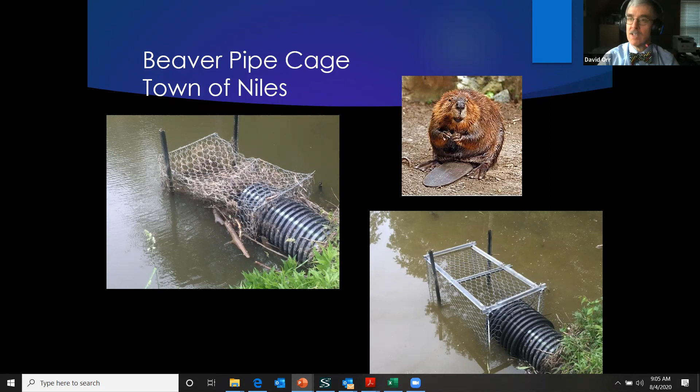Someone says Pat should patent this idea. Actually, the good news is, Pat, by us going public like this, you can't patent it anymore. No one can steal your patent because it's not patentable anymore under the way the rules work these days. But it's your idea. That's what my wife was saying, geez, we ought to put a patent on that. It's too late now, sorry about that. That's the way it goes.

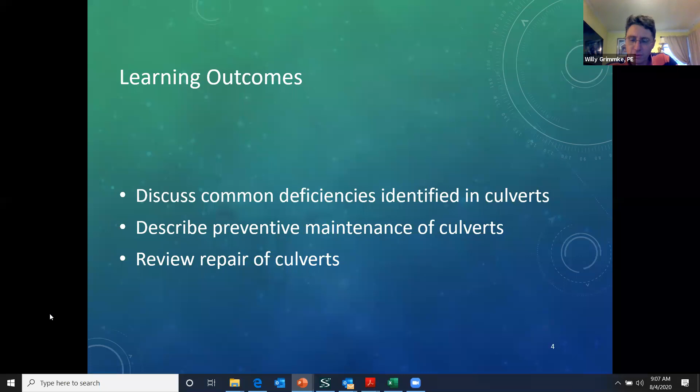Thank you. Good morning, everyone. We're going to talk a little bit about culverts today, and when we set up the date for this, we didn't really think it would be quite as timely with the ongoing heavy rains here in the eastern part of the state, with the hurricane and tropical storm coming through. What we're going to discuss is common deficiencies that you will encounter in culverts. We're going to deal with some PM methods, and we're going to review repairs of culverts.

So just as an introduction and for the purposes of discussion, so we're all on the same page here, we're going to go through some terminology.

So the crown would be the top or the arch of the culvert. The invert would be the bottom part of the culvert where the water flows. The haunches would be the areas between the invert and the spring line, which is the widest point. And particularly with pipe culverts, we're going to emphasize bedding because that is crucially important to the long-term performance of the culvert.

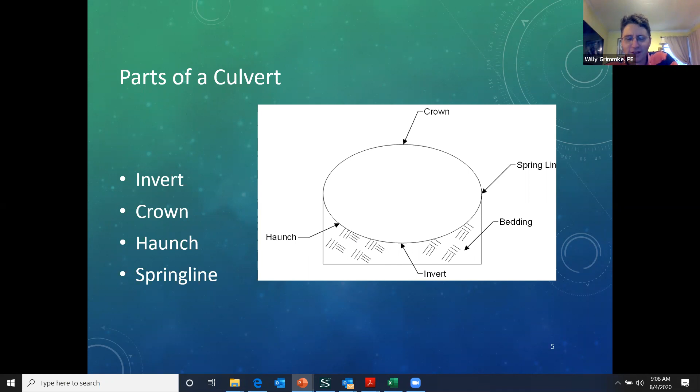And that matters quite a bit during installation. If you don't install it right, you're going to have maintenance issues and problems over time.

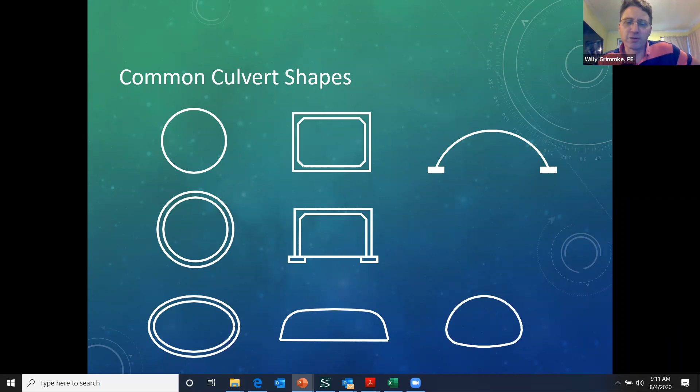Okay, culvert materials. Commonly, we have concrete, and it's rigid. It is dependent on bedding. It needs to be bedded correctly for it to perform well over the long term. I have some slides coming up showing how concrete culverts crack, and that's all predicated on how well the bedding is installed or how well they're bedded. Smooth interior, concrete is relatively smooth, water flows through it fairly easily.

Joints are 4 to 8 feet apart, depending on the size of the concrete culvert. And sometimes we'll get boxes that are skewed, and occasionally we'll cut skewed ends on regular concrete pipe.

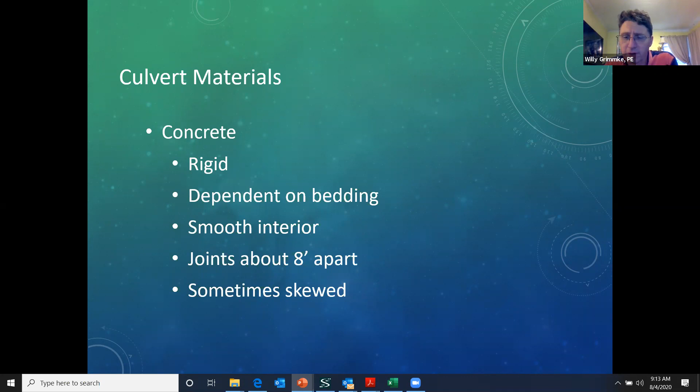And here's some photos of concrete pipe. We got a pair of round ones in the upper corner. We can also get the horizontal elliptical, which are widely referred to as squash pipes. Vertical elliptical, which is essentially a squash pipe on its side. You can get arch pipes.

Precast box culvert, the one here is in Saratoga County, which was actually set last week. So I see Peter is on the call or on the webinar, and that's one of his that Saratoga County is replacing and will be maintaining in the future. And this is a bottomless one. Sometimes boxes are cast in place.

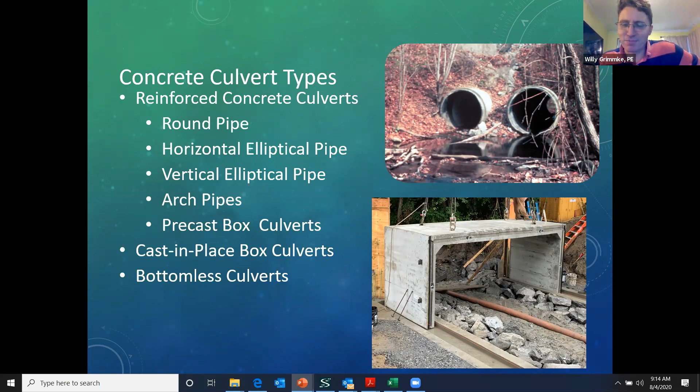Okay, then we move on to corrugated metal. It's flexible. Maybe a little less dependent on the bedding, but very much dependent on the interaction with the surrounding soil and compaction. Corrugated has a rough surface, it's irregular. Very often they're 20-foot single pieces of pipe with joints about 20 feet apart.

They may be steel or aluminum. Round goes up to about 15 feet in diameter. Plate pipe arches, we can get up to 55-foot or 50-foot spans, and the bottomless ones, 55 feet.

These metal pipes are flexible. During installation, they will move a little bit, and if there's any settlement, that kind of thing happening, you will see bellies, deformations, irregular shapes in the pipe.

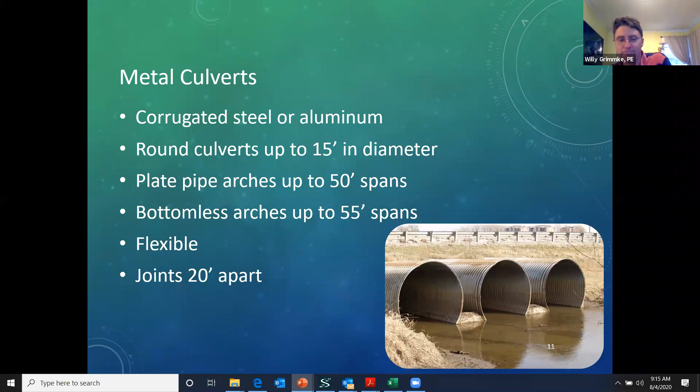Okay, for smaller culverts up to about 6 feet in diameter, polyethylene seems to become very popular, and it has a smooth or corrugated interior. The smooth interior poly seems to hold up fairly well, but like the metal, it's flexible and very dependent on interaction with surrounding soil.

What I want to do is get a show of hands. Who's had experience installing polyethylene or metal culverts? So raise your hand if you've installed a flexible pipe, the corrugated metals or the HDPE. We're about a third so far, and I expect people are just trying to find their hand, Willie. Right, I expect a lot of people have installed these things. About a little less than half, yeah, right now. And sometimes it goes really quickly and easily, and other times they can be a challenge.

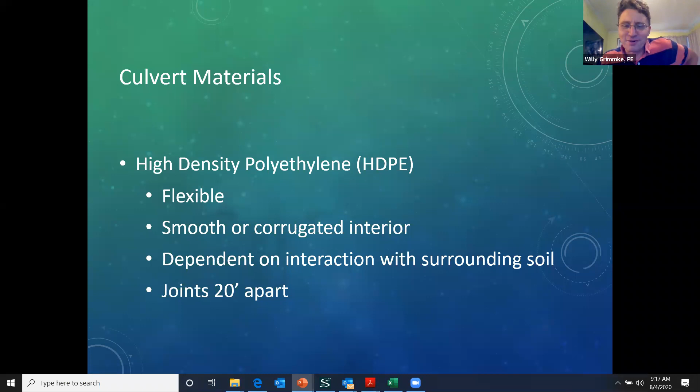Okay, now, and I'm going to harp on this because if they're installed correctly, it maximizes the opportunity to have it perform well over time. It's all about compaction and bedding with culvert installation. And if that isn't done correctly, you're likely to have problems. And then on top of that, maintenance - if you don't properly maintain your culvert, and I'll show you some things where maintenance wasn't successful, you will have problems and you will likely have to replace the culverts.

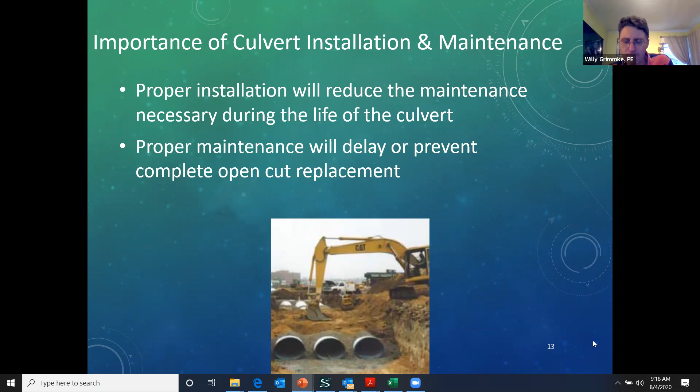Okay, common problems we have: debris and siltation, leaking joints, settlement and sinkholes, which are - the sinkholes and settlement are very often a symptom, not really the disease. We can have undermining. With metal culverts, we can get damaged coatings, which can lead to damage to the invert or deterioration. We can get dents and localized damage, and in concrete, we can get cracks and spalls, and in the flexible pipes, we can get deformation.

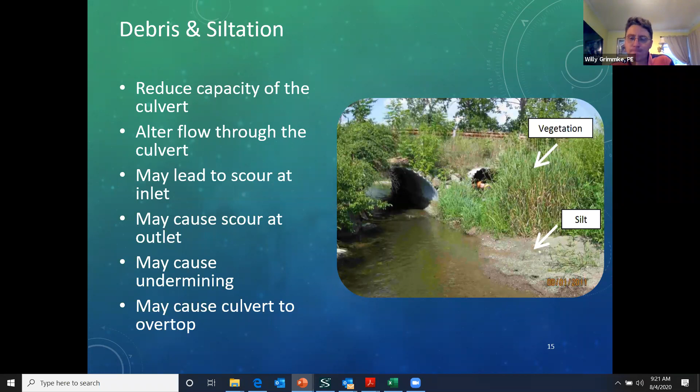We can sometimes get soil built up in culverts, and this will, like in the other one, reduce your capacity. I talked a little bit earlier about embedded pipes. Sometimes it's an oversized culvert and we want a natural bottom in it, but that's not always the case.

Soil in the pipe in the culvert may be due to hydraulics in the stream. We may have an issue with aggradation where the general stream bed elevation is rising, and that's just a natural phenomenon, but we need to look carefully at that when we install culverts in the first place. Or soil in the culverts may indicate that we have joints that are failing, and that's how the soil is getting into the culvert.

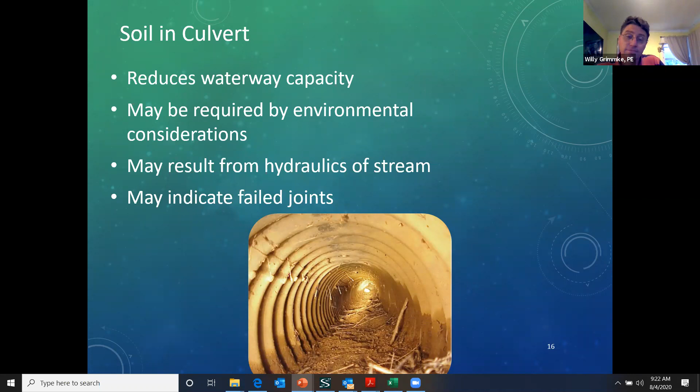So let's talk a little bit about debris. This photo was taken in early July of 2005. We had a dam failure in Washington County. I see Phil Spezio is on the webinar, and he is probably familiar with this.

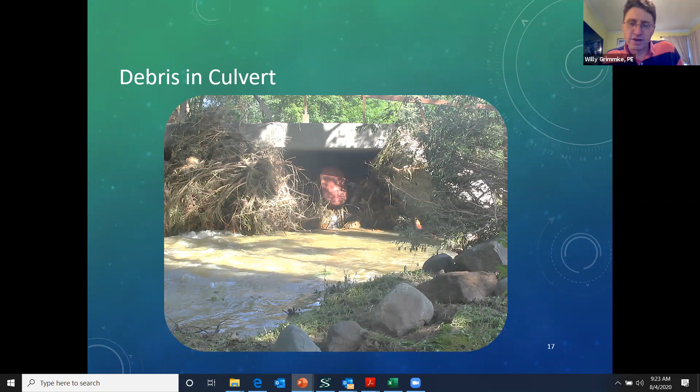So the following day we came out to assess damage, and this was a box culvert, and if you notice, there's a lot of debris that got washed into it. Fuel tank, lots of vegetation, and because of that debris, it impaired the amount of water that could pass through it to the point where the culvert overtopped, and there was road embankment over here on the right.

So that's an extreme case of what debris and heavy flow can do if culverts aren't maintained and cleaned out regularly. In this particular case, in addition to the overtopping and debris, this was not a bottomless box, and there was some significant undermining that had to be corrected also.

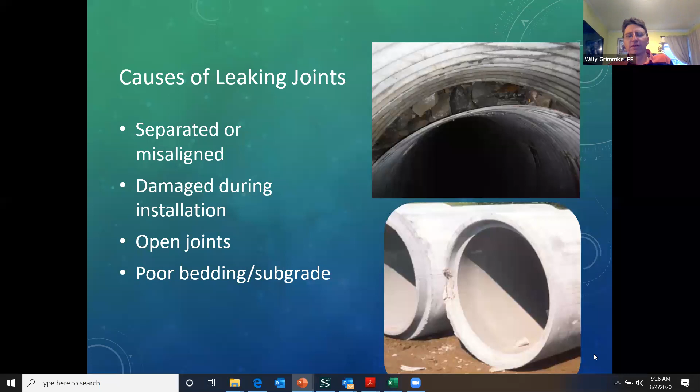So the culvert ended up with a smiley face, kind of downward bow through the middle with the joints opening up at the bottom. So if you're likely to have settlement, you want to be conscious of that.

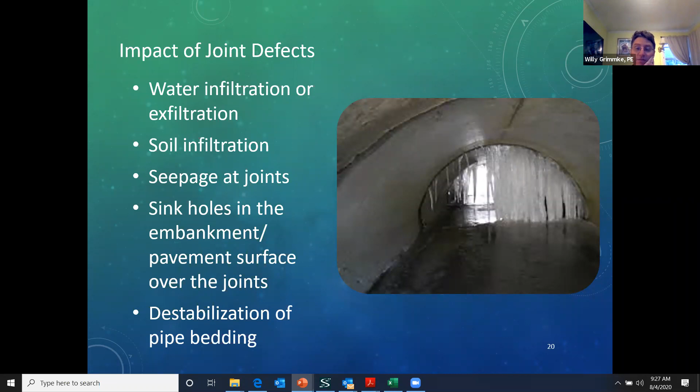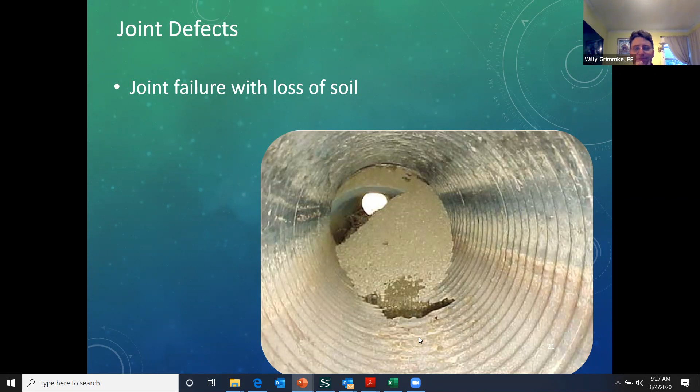Okay, so this looks like a fairly small, relatively innocuous hole in a city street. This is an illustration of potential leaking joint problems or opening joint problems. This was on Route 50, or actually Ballston Avenue in the city of Saratoga Springs back in 2015. This was a mill and fill area, and the contractor milled the asphalt and paved an overlay.

And there was a concrete culvert underneath. And several days later, actually like 3 weeks later, the city got a call, said, hey, there's a hole in the road here. So since we were working on the adjacent construction project, I got to go out and take a look at it and put a stick rule down that hole, and it was about 4 feet deep.

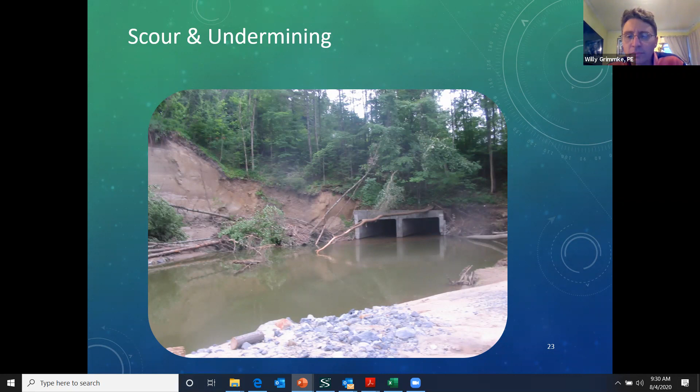Okay, dents and localized damage. This particular culvert has a big crease in the top of it. We suspect what happened here was during installation, whoever was installing it backed over it with the track hoe or the dozer before there was adequate cover on top.

As you can see here, it says 25% deformed vertical. Well, that's going to have some fairly significant capacity impacts because it's not going to take the water we need it to take. In addition, you see down here the joints are failed and open, which is going to be problematic. We're going to talk about repair options later, but if we don't want to dig it out, something like this severely limits our options for relining. Slip lining, for example, is not going to be an option here because you're not going to be able to slide something in with anything remotely close to the capacity we need.

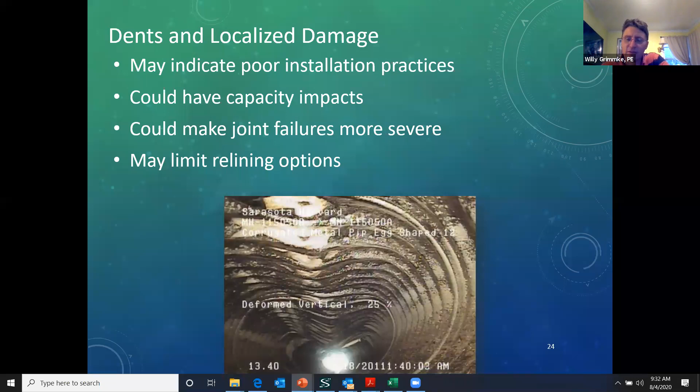Here's another deformation of the pipe. This one is less severe, and it's similar to what I was discussing with the concrete pipe, where it's bellied or settled out in the middle.

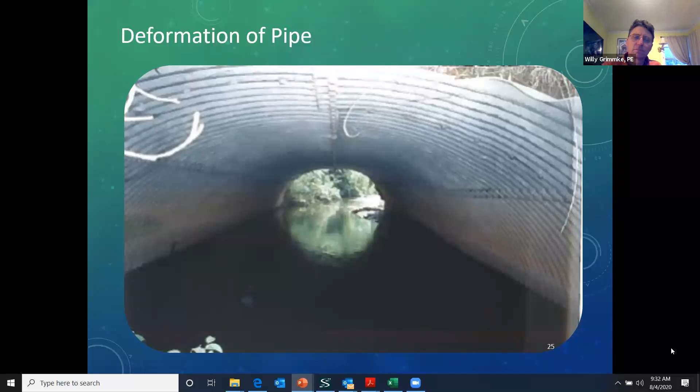Okay, with concrete pipes—and I didn't mention, but also vitrified clay pipes, which some of us will have in our older inventory—you can get cracks and spalls. Here's a crack, the longitudinal crack down the spring line of a pipe.

Now, when you're looking at your rigid pipes, concrete, where the cracking is will indicate the mechanism causing it. If you've got cracking at 12, 3, 6, and 9, it's probably due to poor side support, so as the pipe is loaded, it's going to tend to push out. If you have cracking at 5 and 7, these are longitudinal cracks, meaning the haunch areas were not compacted adequately during installation, or there has been loss of support there. If you have good side and haunch support, you should retain the integrity of the pipe and not have longitudinal cracking.

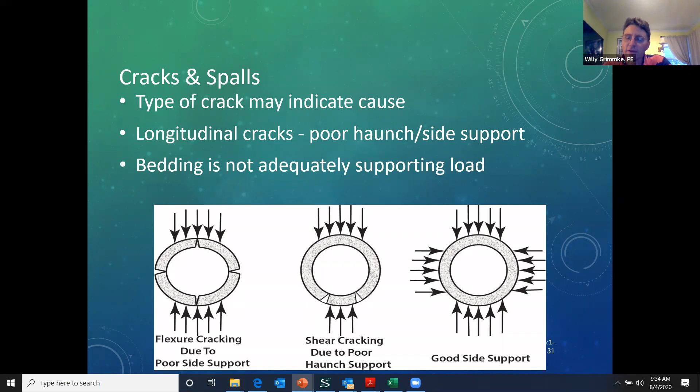Now, if you've got transverse or radial cracking, it indicates issues along the length of the pipe with support. If your cracking is at the invert, you've typically got inadequate support in the middle. And if it's at the crown, it's inadequate support at the ends.

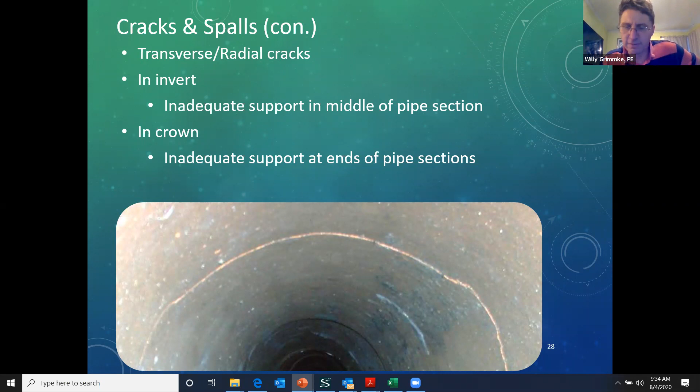I'll go to the illustration. Typically, concrete pipe is bell and spigot, and the diameter of the bells is a little bit larger than the spigot, so everything fits together. If the pipe is completely resting on the bells with no support along the barrel of the pipe, you're likely to get a broken belly and that radial or circumferential cracking at the bottom, at the invert. If the barrel of the pipe is supported but the bell ends are not, the likely symptom will be a broken back, or circumferential crack, at the crown of the pipe.

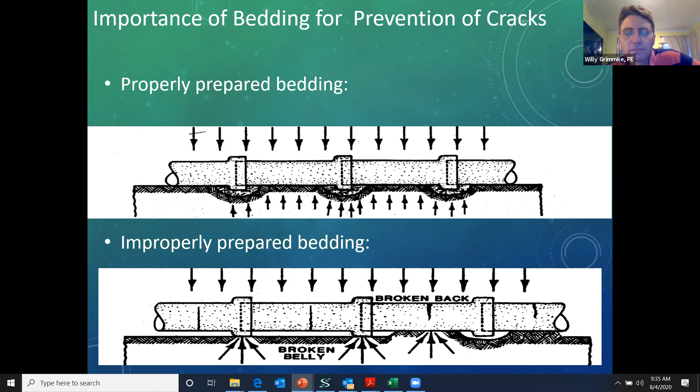So as we move on to other things we find, here we have damaged coatings. Very often our metal pipes are galvanized. They may be coated, asphalt coated and galvanized, but over time those coatings will deteriorate. In this particular case, we've got a galvanized plate pipe.

I suspect everybody seeing this photo can estimate about where normal high water is, because right at the spring line is about where the corrosion and loss of galvanizing is. Down here, we don't appear to have a lot of corrosion because that's being scoured away on a regular basis, and we have section loss.

Now, the loss of coating in and of itself isn't typically a huge problem, but it's a preview of things to come. It means we're going to start having issues with corrosion and deterioration that we're going to need to deal with at some point in the future.

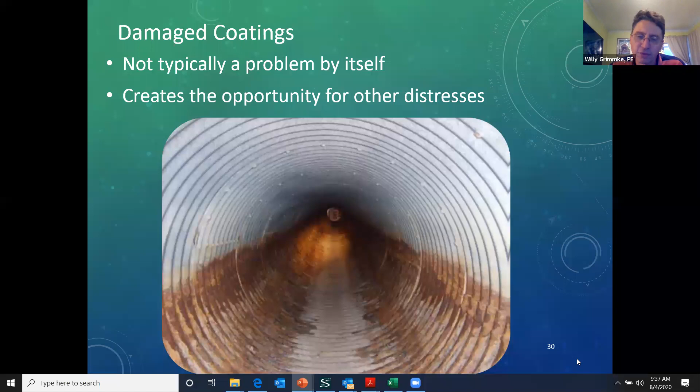If that goes unchecked, the loss of coating, we may end up having pitting and corrosion, which will start to deteriorate the pipe and lose section loss. Now, the key indications of this, or what will cause that, is either acidic or saline water. So if you've got a lot of salts or acids, you're probably not going to want to use a metal pipe.

And soil chemistry is an issue. If you have low electrical resistivity, it will accelerate corrosion. In concrete culverts, if you have high abrasive bed loads or water chemistry with certain chemicals in it, it will eat your concrete and destabilize the culvert.

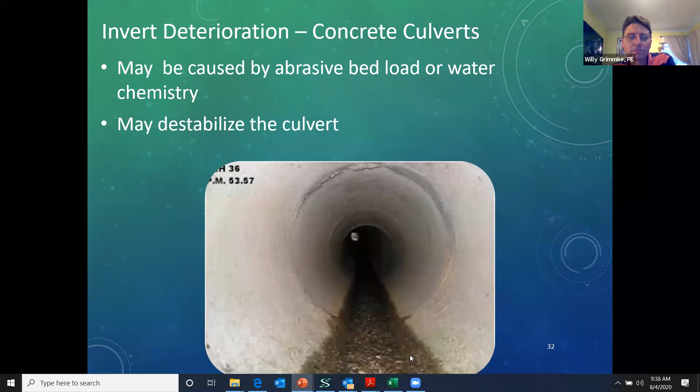Hey Willy? Yes. Somebody in the Q&A mentioned that there is a water condition calculator available for CMP pipe from the National Corrugated Steel Pipe Association. And that is an important tool to use because it will give you an indication of what you need. And the corrugated metal folks really don't want you using their stuff where it's not going to work out well, because it doesn't reflect well on them.

Well, the other thing you can do is the state in their highway design manual has charts where they've done some of the calculations, and you can use them as a quick guide to see if you're close. And if you're in certain parts of the state, they actually don't even recommend aluminized steel type 2. Right.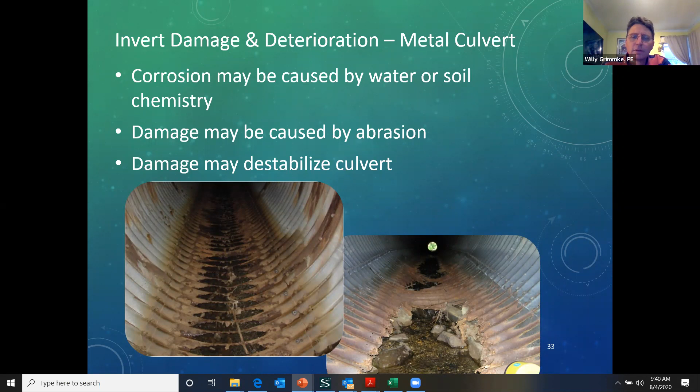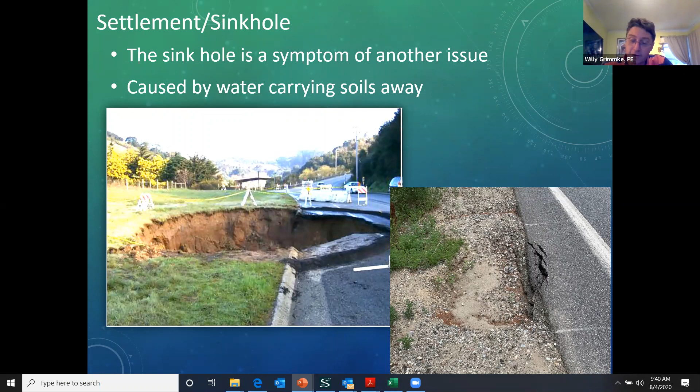Okay, so settlements and sinkholes. These are issues that can happen if you have problems with your inverts or joints. The one on the right's in California, the one on the left's in California. The one on the right is in Essex County, on a road that's being reconstructed as we speak. Sometimes the whole thing will go south, and this obviously was not maintained. Or it could just collapse on you. So these are some of the problems we can have.

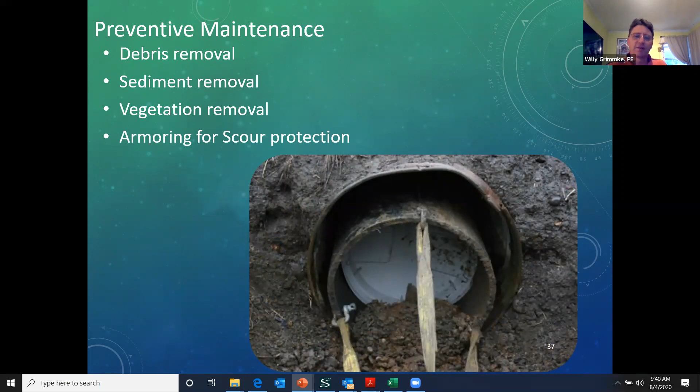Now, how do we fix it? How do we deal with it? Well, let's deal with debris. You've got to get it out of there depending on what it is. Debris, sediment, vegetation, and we can do armoring or scour protection.

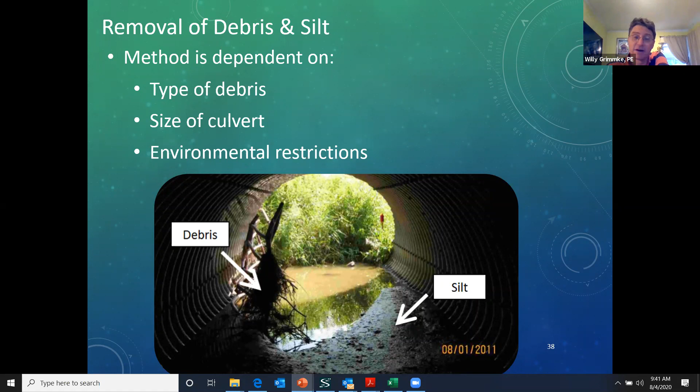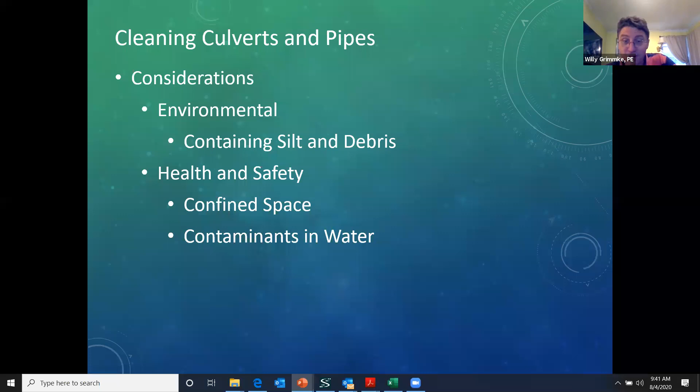So large debris, what do you use? Often outside the pipe, I've seen excavators with the thumb that grab debris. Large equipment, I've seen manned entry. Folks go in with chainsaws, cables, and hook them up and tow them out. Mandrels, a smaller pipe with debris inside. I've seen the track hoe with basically a piece of telephone pole just to push stuff through.

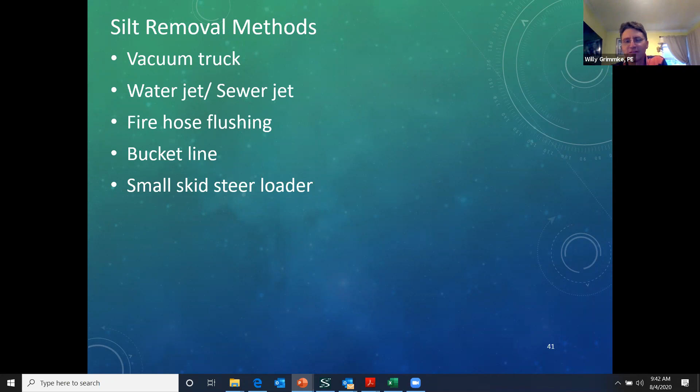For silt, a vac truck in Washington County, a vac truck sewer jet in Washington County - we managed to get the old sewer jet from the sewer agency. And for smaller culverts, that was reasonably effective, provided there weren't other distresses. You can flush it out with a fire hose. In an earlier photo, we saw a bucket line being pulled through. And in large pipes, if you can get mechanical equipment in the waterway, you can sometimes use a small skid steer or small excavator.

Scour repair depends on the severity. What do you want to do here? But before you do anything, you want to talk to your hydraulics folks to make sure you're using the appropriate material. You don't want to use stone that's way too small because it's just going to get washed downstream, or way too big - you may need to grout. And if you're working in the stream, yeah, you're probably going to require environmental permits.

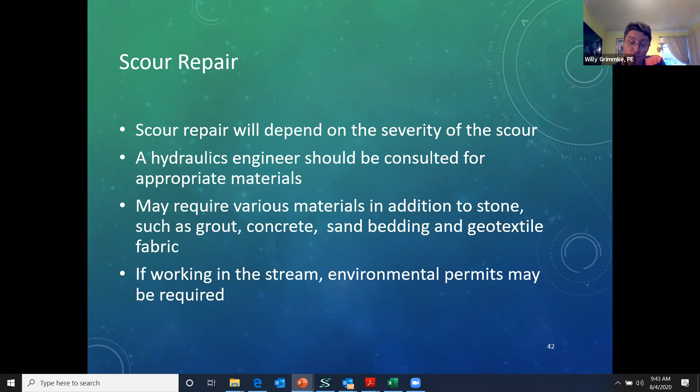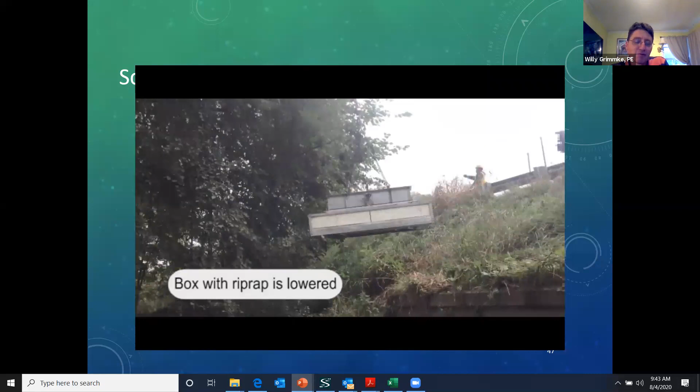Michigan DOT was having some issues with scour in their underwater, or their bottomless culverts. So they devised this device to help them place riprap in their bottomless culvert. Watch the video here - basically this is a raft of sorts with a hopper that holds relatively small size stone fill, that they lower down into the waterway with a crane. They probably should have used the tagline.

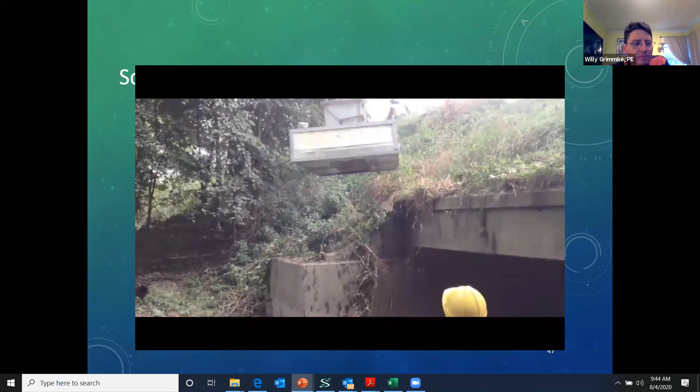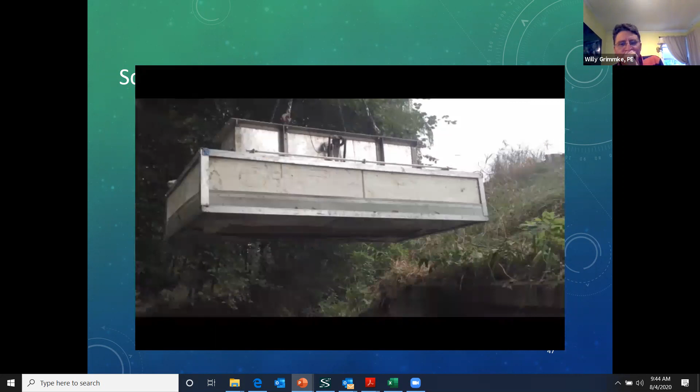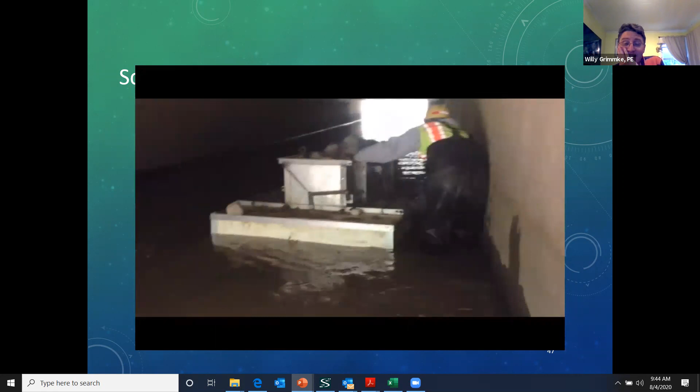Because it floats, they float the stone into position. And when they get it where they want it, they drop the stone where they need it. Afterwards, they can fill it with ice and have a cooler, as they go floating down the river.

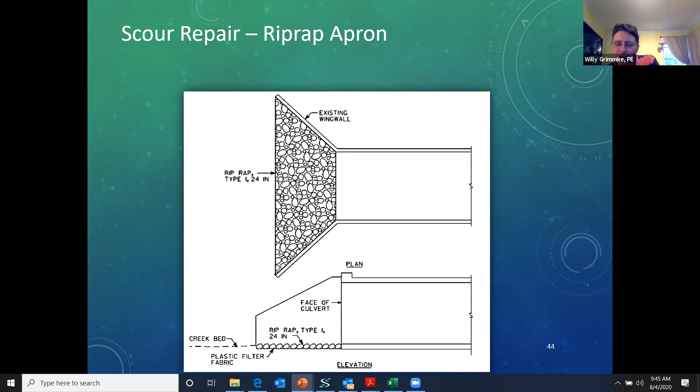Other options, if you have scour at the inlet or outlet, are a riprap apron or a concrete apron. This is a Georgia DOT detail. You'll want to talk to your engineering folks to make sure you're sizing and placing it appropriately.

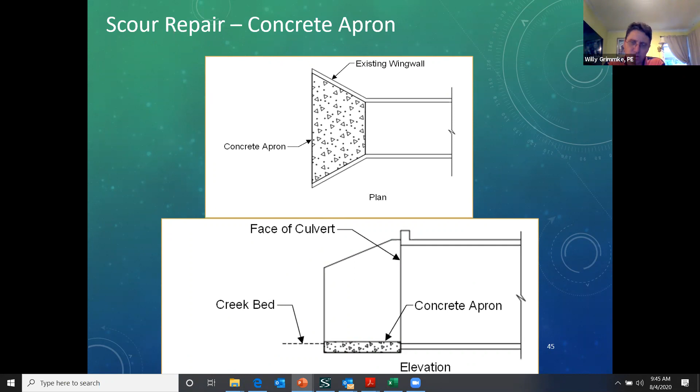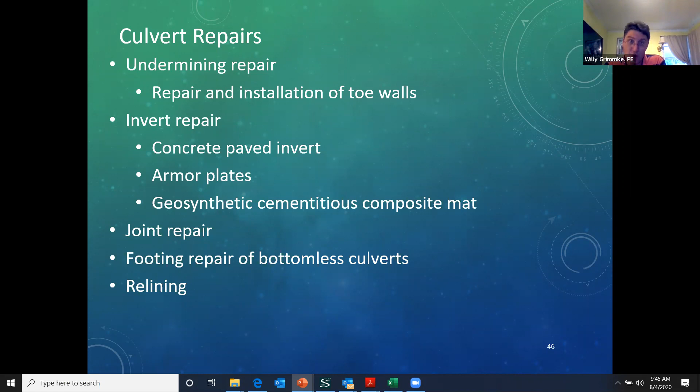Now we're going to get into more than just basic maintenance. We're going to get into repairs, fixing things.

If you have the potential for scour and undermining of your culvert, looking at a toe or cutoff wall may be helpful. It won't prevent the scour hole, but it will keep that scour hole from migrating underneath the culvert and destabilizing it. But for this to work, that cutoff wall needs to be below the maximum expected depth of scour, so you'll need to talk with hydraulics folks to make sure you're down under that.

To do that, the stream gets diverted, you form the toe wall, anchor it or attach it to the culvert, cure it, put back scour resistant material in your backfill, and you're back in business. And like many of these, they're much easier described than actually executing.

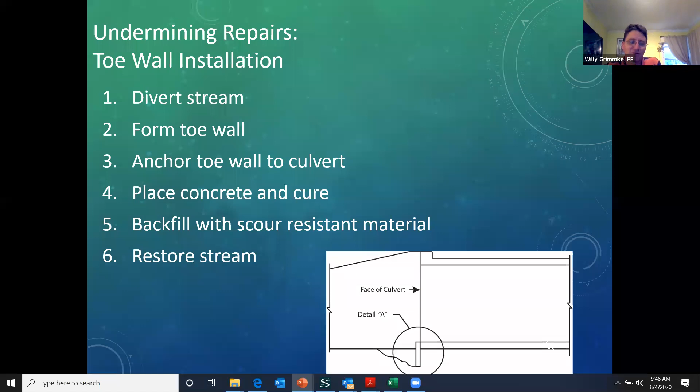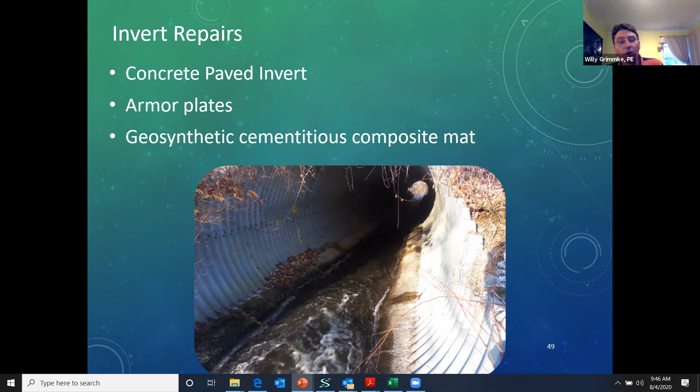If you have invert failures or invert deteriorations, there are methods to fix that, including placing a paved concrete invert, armor plates, or geosynthetic composite mat.

This photo is one of a culvert that New York State DOT repaired with their own forces here in Washington County. They diverted the stream, cleaned the invert, formed and placed the concrete, and restored the flow. And we have a concrete invert here.

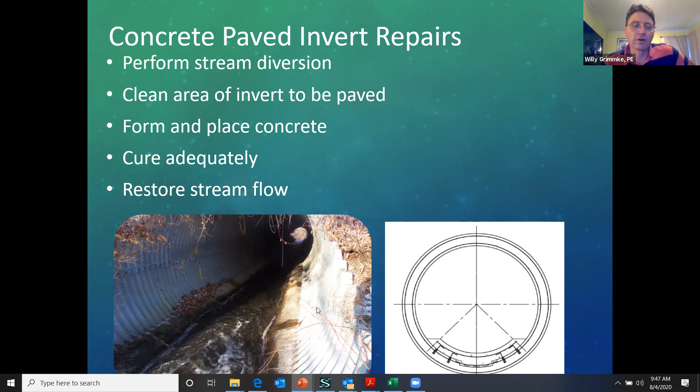If you have severe abrasion problems, armor plates can be used. This may not sit well with the environmental folks, but it may preserve the culvert invert. Basically, a flat plate is anchored in concrete on the bottom with plates up the side.

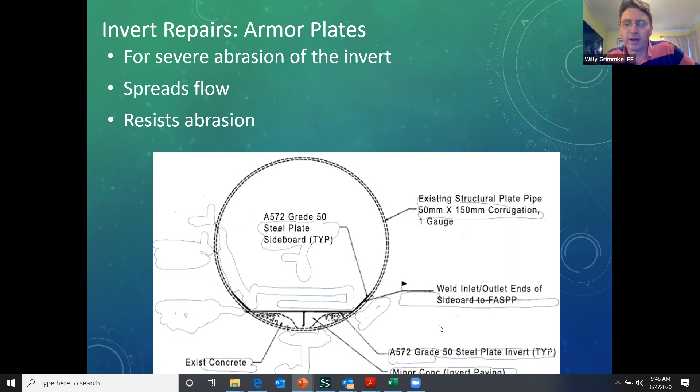One thing you can do there is put in those baffle plates, the vertical ones, to slow the flow down. That's a balance, right? This will keep it from deteriorating out the invert - it's a much heavier plate. The plates are welded here on the edge of the pipe and anchored to a concrete bed in the bottom.

This is a proprietary material, which is basically two pieces of geotextile, like a geotextile quilt with mortar in between. It shows up dry, you clean the culvert, lay the pieces in a shingle fashion, attach them, wet them down, let the cementitious material cure, and back to stream flow.

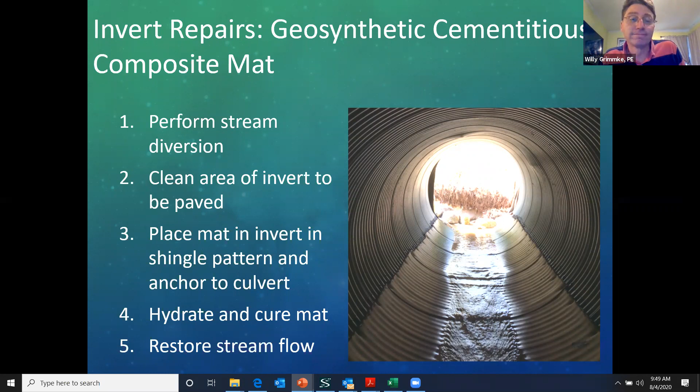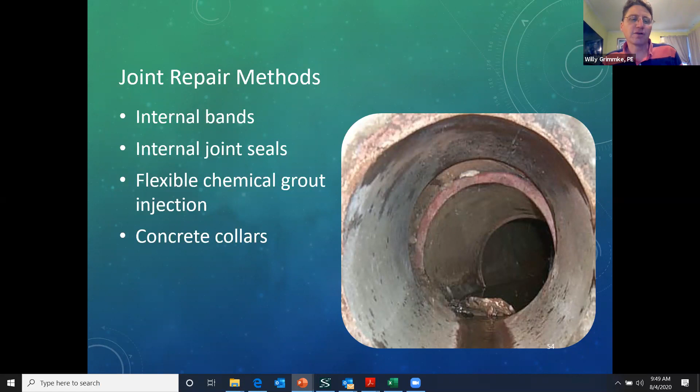Joint repairs. This is an extreme case with clay pipe, but possible ways to do joint repairs are internal bands, chemical grout seal, or collars.

This was a reline job, but the internal bands can be used for existing joint separation issues if they don't need to be watertight, and the bands are put in place and forced into place with the threaded rods that you can see.

The limitations on this are the joints have to be reasonably well aligned, but just starting to separate. If they're badly out of alignment, you're not going to be able to line the bands up. The other issue is with the threaded rods on the interior of the pipe, they can accumulate debris.

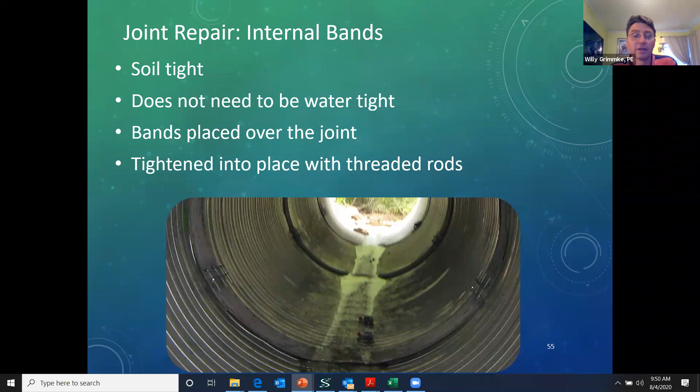Again, a little more extensive, chemical grout injection, and this can be done either from the interior or from above, and it creates - the grout is often a hydroreactive grout that reacts with the water and will form a seal. Typically done by a specialty contractor.

And if all else fails, you dig it up. If the pipe is fine and the joint doesn't need to be replaced, you form and pour a concrete collar around it, but you need to make sure you get inside and seal it up so you don't fill your culvert with concrete while pouring. That might reduce capacity a little bit. Yeah, it would, just a little bit.

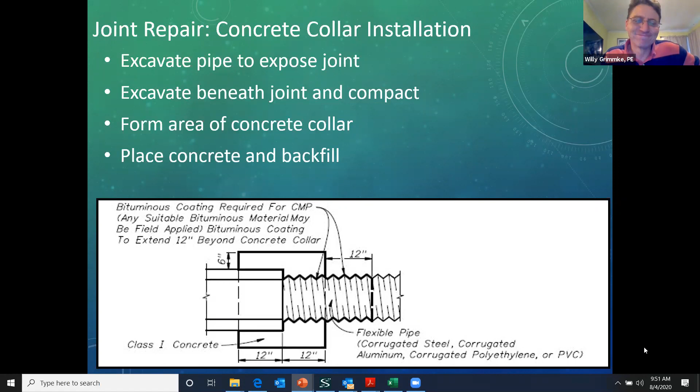This actually is a Florida DOT detail. Now, when things start to really go bad, you can look at relining your pipes. You can slip line, you can shotcrete or spin cast, or you can use cured in place.

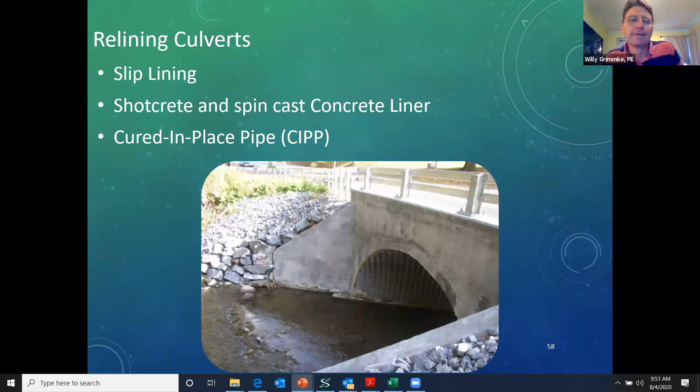So for relining, for slip lining, you use corrugated metal pipe or plate arch, depending on the size. You can use smooth interior metal pipe, or HDPE. The issue with slip lining is in order to fit inside the old pipe, you're going to reduce the waterway area a little bit and reduce capacity, so you want to make sure this is engineered correctly.

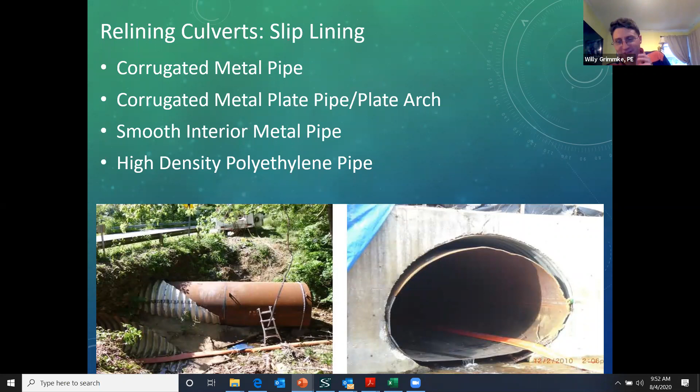There are also limitations, because if you've got major deformations, it's not going to slide through. You're going to have a problem.

This is a photo of a Washington County DPW crew slip lining a pipe arch on a bottomless, corrugated arch bottomless culvert. They poured new footing and then bolted the arch together and slid it through. The challenge with this one is it was skewed, so the forming became a little more interesting to form and fill that annular space with grout.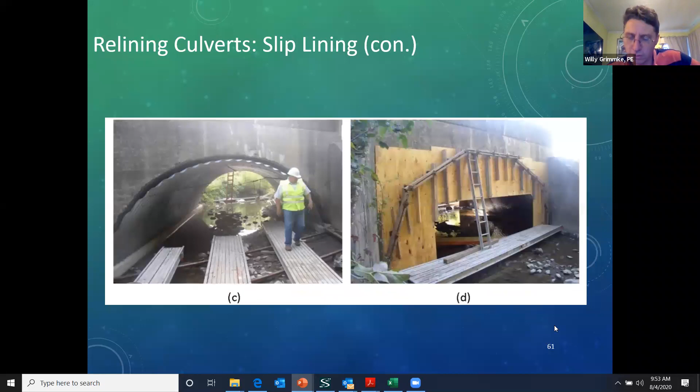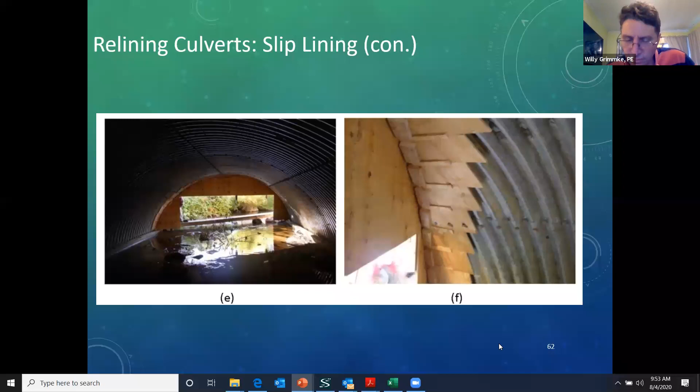And here on the right shows what they had to do to keep the corrugations from leaking when that was placed. In this particular case, they poured it, excavated in the top. Here's the old pipe that was cut out, and here are the corrugations of the new pipe, where the concrete was placed down there and vibrated in.

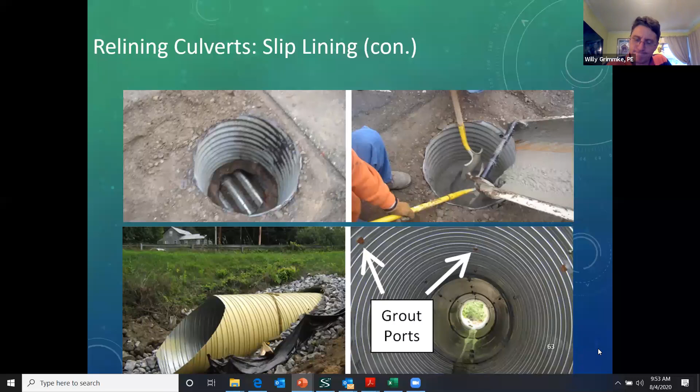For other ways of slip lining where it's slid through, there may be grout ports in the pipe and grout may be pumped in. In this particular case with the polyethylene pipe, they had grout injection pipes at various lengths and locations to fill that space with grout.

For relining, you can also use spin cast or shotcrete for a uniform concrete interior. Spin cast uses a rig that spins and sprays concrete uniformly around it. This method is more forgiving of distortions than slip lining, but again, you've got to clean it out.

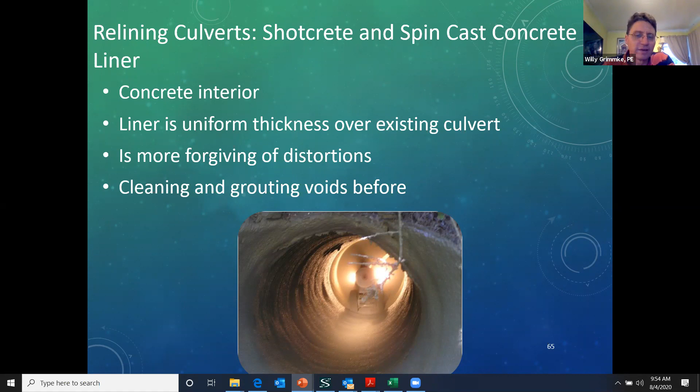We have a couple of notes here that we're putting in the Q&A pod real fast. One was somebody mentioned DOT will actually use shotcrete for doing bottom repairs. And the other note was that DOT doesn't endorse spin casting. DOT may not, but other states like Alabama have had good success with it. I think it comes down to your QA/QC.

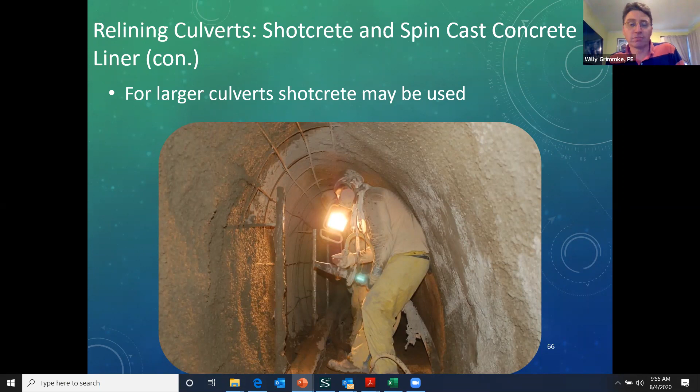QA/QC is critical, particularly with any of these shotcrete type applications, and whoever's operating it is very important to having it be successful. For larger culverts or irregular shapes, shotcrete may be appropriate.

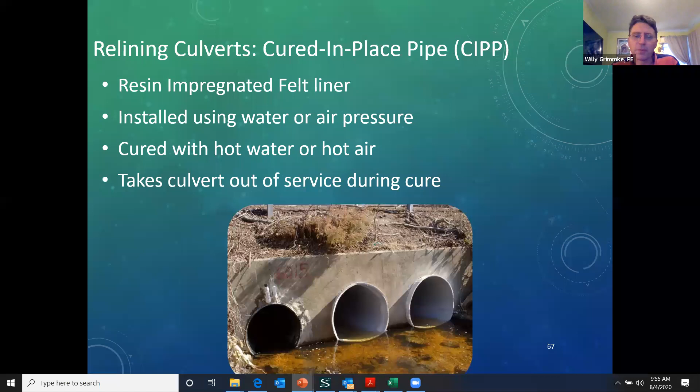Another option is cured-in-place pipe. That's a resin impregnated felt liner that is inserted into the pipe, and either hot air or hot water cures that thermosetting resin, giving you a new smooth-lined plastic pipe.

One of the processes uses an inversion method, so it's sort of like a sock that you fill with water and it pushes against the walls of the pipe, and then that water is heated. In some locations that can be successful, and that's the inversion coming out the far end of the pipe.

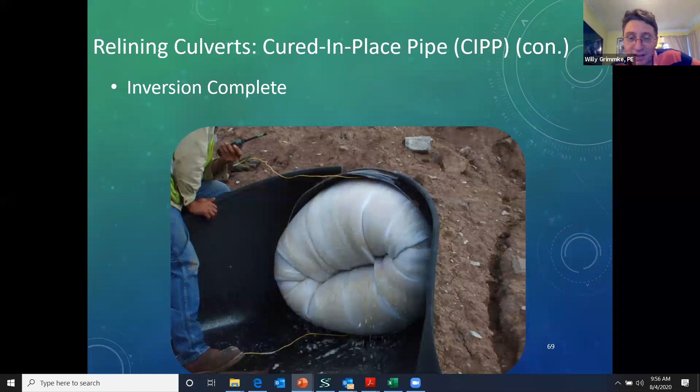I have had some exposure to this type of application. It's not inexpensive, but if you can't close the road, it may be a viable alternative.

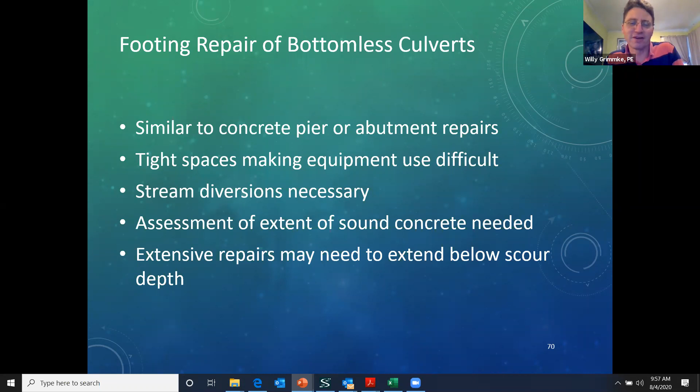Finally, footing repair to bottomless culverts. The challenge with this is we're working in tight spaces, and you've got to do some stream diversions. It's like any other concrete repair — you're getting down to sound concrete, below scour depth if you need to.

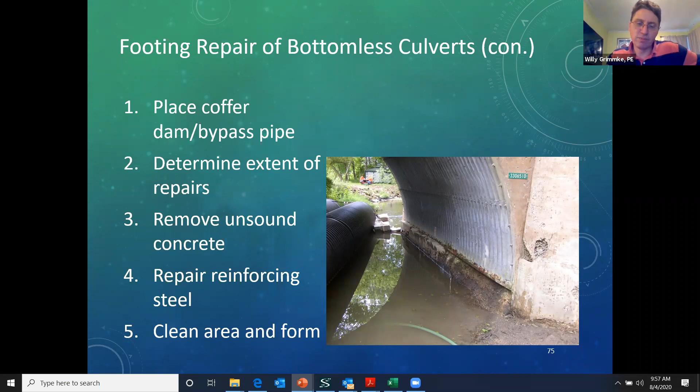Assess your unsound concrete, put in new rebar and concrete, clean it up, pour, and reestablish the stream.

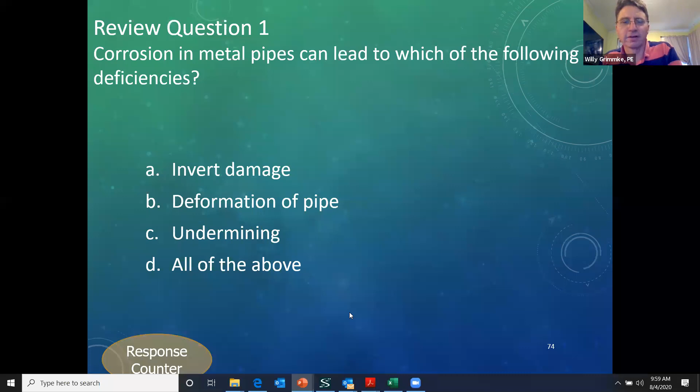You're making them think a little bit here, Willie. Come on, it's early. Yeah.

Well, at least this one didn't have 'none of the above' and then 'all of the above' below it, which causes all kinds of logic issues. Yeah, well...

We're getting close, I'll wait till we get 3/4. Okay, somebody mentioned there's an NCHRP study looking at LRFD design for cast-in-place concrete culverts. That would make sense because it's structural, it's a bridge. Well, the challenge with that is how do you determine some of the resistance factors? True. Okay, I'm going to end the polling and share the results.

72% said placement of riprap and installation of toe cutoff wall, and 26% said everything. The riprap and the cutoff wall are the answers we're looking for.

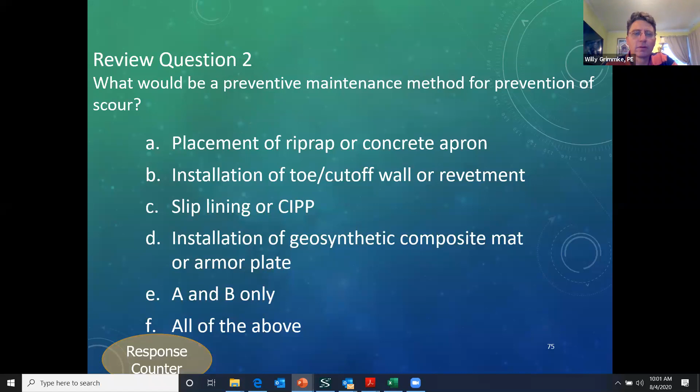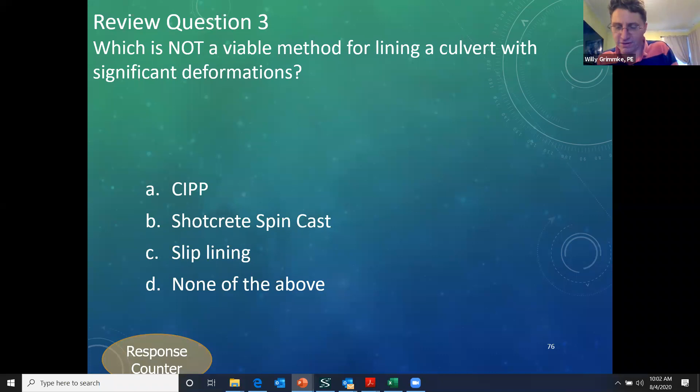Because you're not going to be able to slide it through if you've got deformations. It'll interfere, hang up, you'll have issues. And you'll have a hard time getting the structural support you need. Exactly.